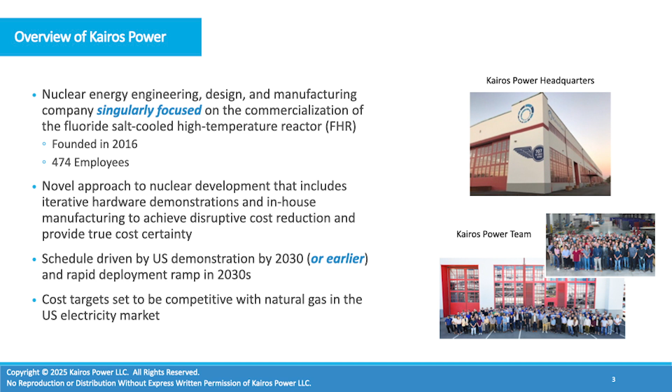Licensing certainty, it's a very heavily regulated technology, so you have to be able to convince your regulator that you've got the right approach and the right design. So there's a lot of licensing risk for new nuclear technologies. Supply chain and manufacturing. So this is a new technology. Do you have a supply chain? Do you have the capacity really to build the pieces and parts that go into your reactor technology? And last, but certainly not least, construction risk, build certainty. That's a really important piece of really deploying these technologies on cost and on schedule.

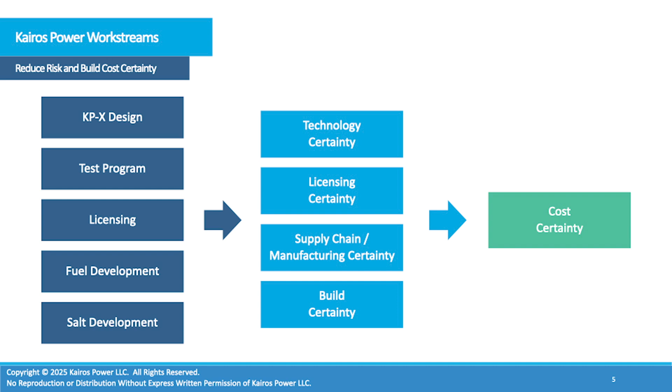So in practice, everything we're doing right now really feeds into these four buckets. So all of our dominant work streams right now, and all the iterations that I'm going to talk about today in terms of our demonstrations, really go into these four buckets here. Technology certainty, licensing certainty, supply chain certainty, and really build certainty. And we believe if you're not working on all four of these while you're developing a new reactor technology, you're most likely going to have challenges on the back end.

And if you look at the time cycles that it took to actually get that reactor technology deployed, actually up and commissioned and actually operating, you're talking about a 30-year development cycle. That's a very long development cycle from 1990 effectively all the way out to 2024. So really trying to drive those development cycles down is a really big part of what Kairos is trying to do.

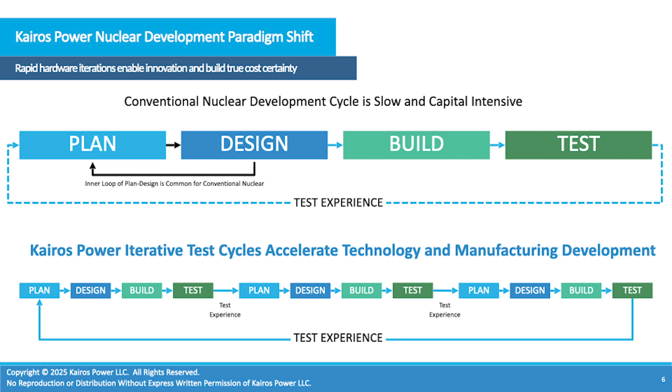There's a lot of challenges in going 30 years for a development cycle that I don't need to spend time here talking about, but that's really the paradigm that we're trying to break right now. And we do that actually in a non-intuitive way. We do it through a series of smaller iterations, and I'll talk a little bit about how we do that, but the important piece here is we get feedback into our design earlier than you would get if you're going through these larger development cycles.

So how does that happen in practice? So what we do at Kairos, we focus a lot on non-nuclear development. It allows us to move actually quite quick. We'll talk a little bit more about these projects here in a second, but we have a series of what we call our engineering test units. There's engineering test unit 1, 2, and 3.

Engineering test unit 1 and 2, they're located here in Albuquerque, and I'll talk a little bit more about what those projects are. The engineering test unit 3.0, that's actually in Tennessee. And then we have our 2 demonstration reactors that we're working on right now, which are Hermes 1 and Hermes 2. So a lot of my talk today is going to be giving updates really on these engineering test units and what we're doing in Tennessee on the reactor side.

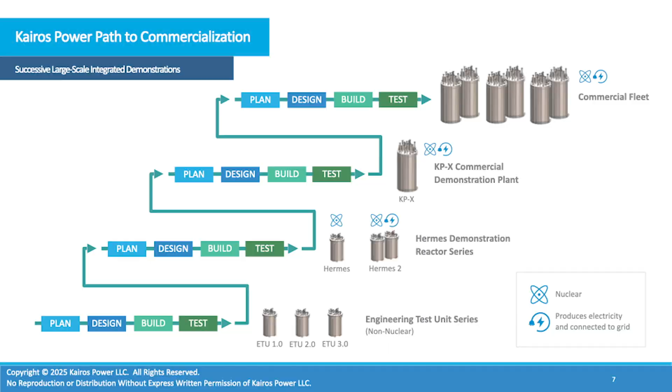Just a little bit about the company and our locations. We have a presence actually across the United States. So we're headquartered in Alameda, California. We opened up our manufacturing development campus in Albuquerque in about 2019. It was a very dynamic time. Unfortunately, the pandemic hit right when we actually announced we were going to buy the property, and that created some challenges in terms of early staffing. We had plans to bring people out to California, really for a lot of knowledge transfer. Obviously, the inability to travel during the pandemic created a lot of issues.

We're developing a facility at Los Alamos National Lab to produce fuel for the Hermes 1 reactor, and that's at what's called the low-enriched fuel fabrication facility. And we have an analogous facility right here where we're doing effectively fuel development, but not at the scale that we would want to do in Los Alamos. We have a site in Oak Ridge, Tennessee, where we're building the Hermes 1 and Hermes 2 plant. We started construction on the Hermes 1 reactor, so that work has already started.

We have a small licensing office in Charlotte. We have an instrumentation lab in upstate New York, and we have a facility at a partner called Materion, which is actually where we produce our coolant FLIBE at scale. So that's an important location for us where we produce our coolant.

So I mentioned vertical integration. Really, the vertical integration that we've been focusing on does include some of our major work streams. So fuel and salt are really important to Kairos. That's very important to our safety case. It's important to making our reactor work. So we've made commitments to bring in salt production as well as fuel production. These are just examples. I mentioned the site that we have in Elmore, Ohio. That's where we're able to produce metric ton quantities of FLIBE that we need for our reactor demonstrations.

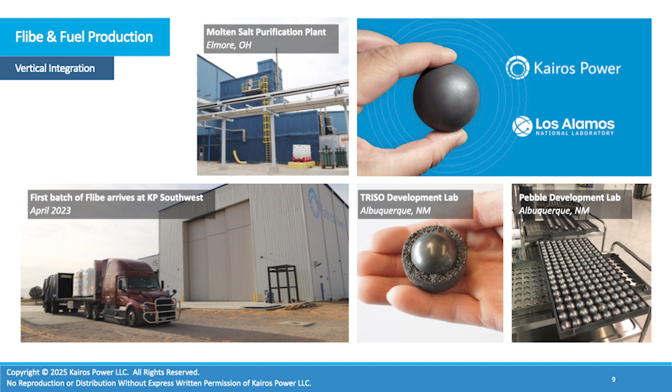We have a pebble development lab where we produce pebbles, and effectively we're standing up a TRISO development lab where we have a state license and we work with effectively natural uranium and depleted uranium. So it enables us to iterate very quickly and bring in design concepts into the fuel form itself.

In terms of manufacturing, about a quarter of Kairos is actually in manufacturing, so we have a very big manufacturing presence. We hold an ASME stamp for Section 8, so we're able to do vessel production. We set up a lot of this capability with actually a lot of local hires. It's been a great process in terms of standing up the manufacturing.

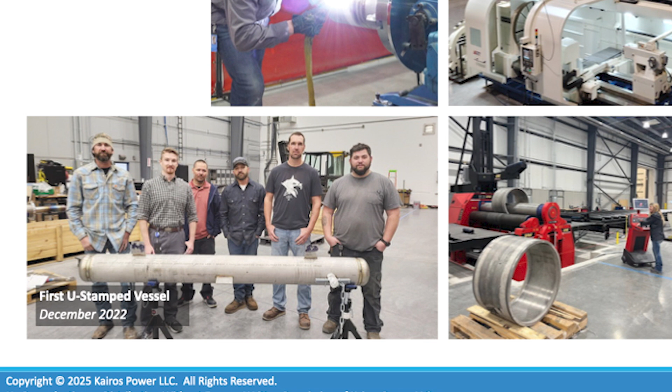So in terms of manufacturing capabilities, we've stood up a lot of milling and turning capabilities at our site, and that's shown in the upper right. Up there, we have a pretty substantial welding team. We brought in vessel manufacturing. That's an area that we've been focusing a lot of our attention on. We will be producing our own reactor vessels as well as vessels that support the overall technology.

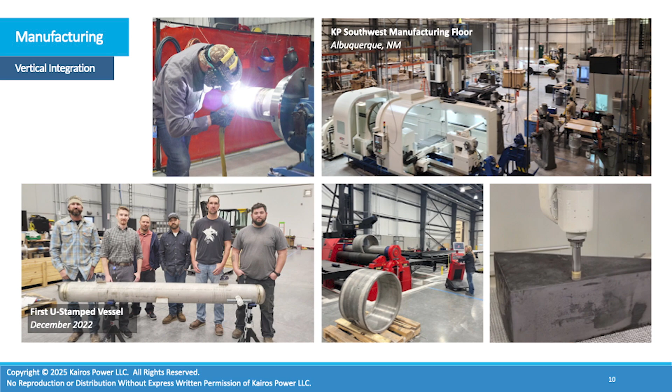And in the lower right, we have graphite in our reactor as a moderator. It's a very important part of the design. The graphite machining is a capability that we've also invested in and are standing up. So there's a lot of manufacturing activities happening down in Mesa del Sol. It's effectively where we do our large-scale manufacturing and a lot of our large-scale testing.

To talk a little bit about a commercial agreement that was announced. We have an agreement with Google that was signed recently. You may have seen the news around that. There's been a big push from the hyperscalers and a lot of interest in AI power demand challenges. And so we have a partnership we're very excited about with Google. We've signed a master plant development agreement that really creates the right framework for us to set up power purchase agreements with utilities and regions that Google is trying to service. So that's a process that we're going through now.

And we do, oh great. Whoa, that's pretty loud.

We do plan to have some news that will be coming out in the public domain relatively soon. But this is an agreement that allows us to work through the commercial case on the back end, which is really important to us.

Here's some additional information around the vertical integration part. These are just some of the pieces and parts that we are focused on. On the left-hand side, you can see some of the manufacturing activities. I'll talk a little bit later about the vessel manufacturing. This is rolling plate here. These are pieces and parts that go into key parts of our reactor system. So a lot of focus on effectively building and demonstrating the technology.

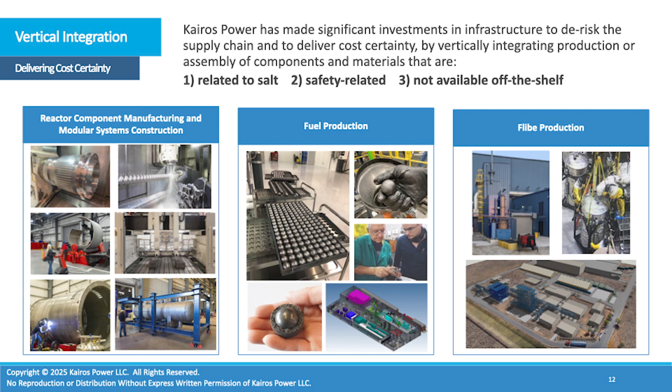These are pictures of the fuel production line and some of the pebbles that went into our first engineering test unit. And then we talked a little bit about the FLiBe production. This is a facility that we just broke ground on in Mesa del Sol, called our salt production facility. We just started construction on it. This is where we're going to produce the enriched FLiBe that we need for our reactor in Tennessee. So this is a big project, setting up the capabilities for us to produce FLiBe at scale.

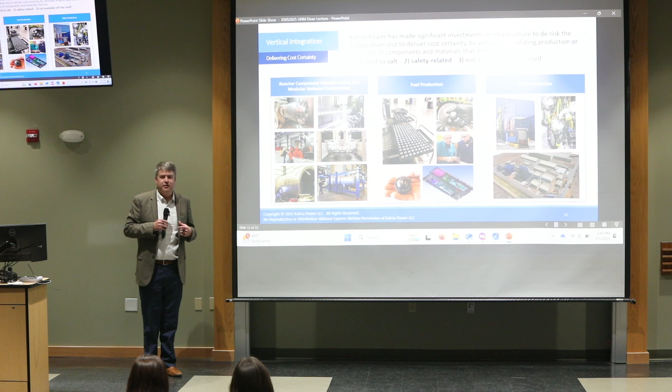An important thing to take away is even though the Hermes 1 reactor is in Tennessee, many of the pieces and parts that make up the primary system actually come from here in Albuquerque and are fabricated here. So a lot of the manufacturing activities are actually supporting that deployment in Tennessee.

So I'm going to talk a little bit about these major iterations. What is Kairos actually doing? We're trying to demonstrate our technology through these iterations. The first one that we built, this facility was run. We've actually decommissioned it and it's been moved out of the current location, but I'm going to talk about it because we got a lot of lessons learned from it. Why did we do this demonstration? I mentioned we do non-nuclear testing.

This is not a facility that's regulated by the NRC. It's a facility regulated by OSHA and EPA and obviously local permitting authorities, but it's not regulated by the NRC. It doesn't have nuclear material in it. It's effectively mock-up material, but it performs mechanically very similar to the reactor system.

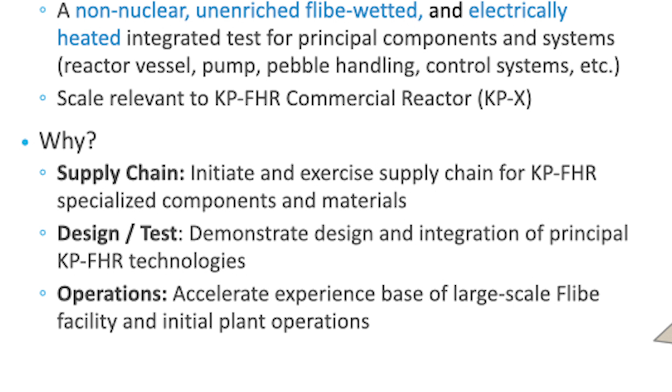The three areas that we were focusing on was really to evaluate our supply chain. If we didn't have a supply chain that can make a mock-up of what we were trying to do, then we knew they couldn't deliver for the reactor system. So evaluating the supply chain was really important to us. It also enabled us to build really an organization that was able to do the design, test, iterations in-house in a very efficient way. So that was also a very important objective for the ETU-1.

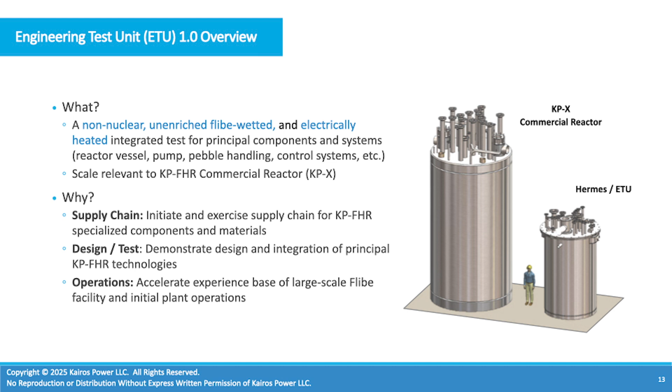And last but not least, once you actually build the facility, running a 24/7 facility like this and getting the operations back into the design, again, very, very critical for Kairos. So again, if you remember my earlier slide where we talked about technology certainty, licensing certainty, supply chain certainty, and construction certainty, these are examples of how this kind of feeds into our development.

So the engineering test unit 1, got some pictures here. I'm going to kind of walk through some pictures of the actual build. As I mentioned, we took the property over right at the beginning of the pandemic. So a lot of this work was happening during that time period. This is all in Mesa del Sol. So this is when we acquired what's called the shop manufacturing building down in Mesa del Sol.

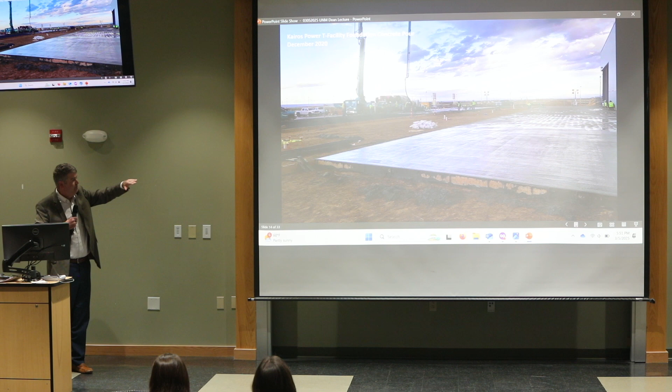The first thing we did was we actually added an annex. It's a beautiful building, but it's actually got a very low high bay in terms of the roof height. So it creates some challenges for doing larger scale tests like what we're building. So I'm going to walk through some pictures that show the engineering test unit 1 in Albuquerque and just kind of show the sequencing of the build.

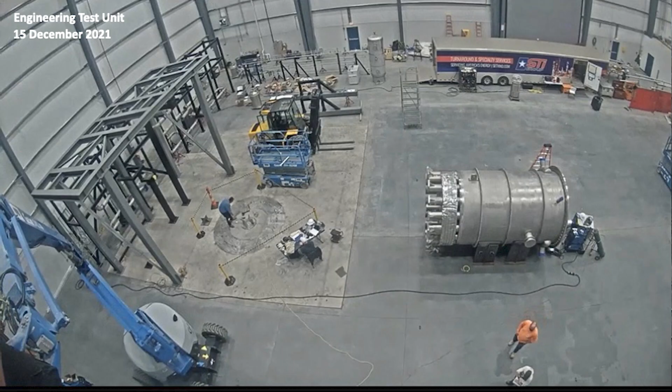So this is what we call our ETU annex. It's now where we do vessel manufacturing. It's a 40,000 square foot pre-engineered metal building. It's what housed our engineering test unit 1. This is a picture of the vessel that arrived. I mentioned we brought in vessel manufacturing.

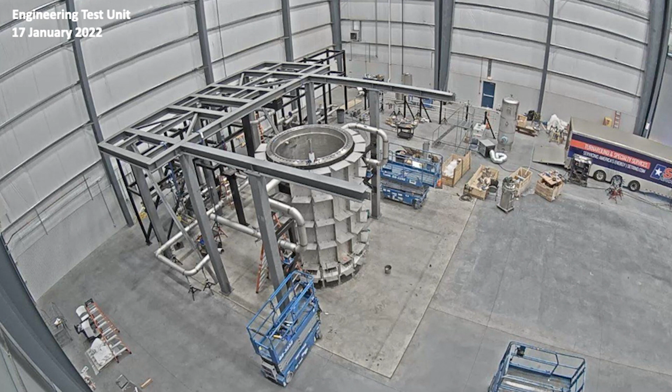This vessel was not produced in-house. It was actually an external vessel. When it arrived, we had some tolerance issues with it, and so we actually had to do a fair amount of machining of the graphite that had to go into the vessel. It was actually a result of this experience that we made the decision to bring vessel manufacturing in-house. So this is a picture of the vessel about to be lowered and placed into its location in the enclosure.

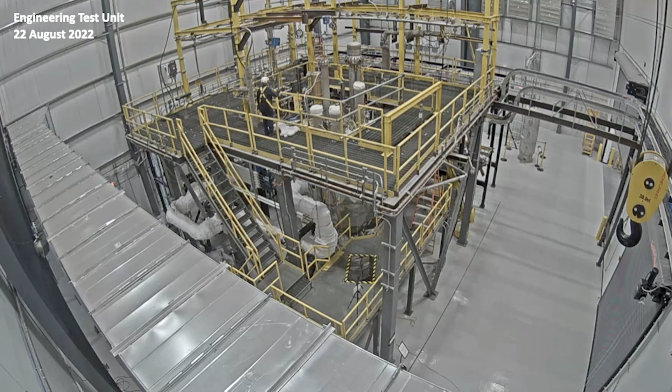Moving forward to August of 2022, you can see more of the upper head equipment has been installed. In the upper region, you've got insulation going up around all of the piping and the vessel, and you can see more of the facility coming together. And this is the final picture of it prior to operations, actually post-operations.

We self-perform a fair amount of the work that we do. Certainly for assembly of the engineering test unit in the upper right hand, you can see some of our team members actually installing the graphite blocks in the reflector structure within the actual vessel itself. In the lower right, you can see FLiBe actually arriving. Again, it's about 12 metric tons that we loaded into the engineering test unit 1, which is a pretty substantial amount of material.

We have 2 control rooms. We have one in Albuquerque and we have one in California. So we're able to do remote monitoring from California as well. This was a big change for Kairos. We're not a 24/7 operations company, but when we started up ETU, it became very clear we would have to run this facility 24/7, and we had to do it over several holidays, and this was a big shift for the company, but it actually created a lot of opportunities to build up the operational program that we're going to need for our reactors. So what are some of the lessons learned?

I mentioned really from the ETU1, we had some tolerance issues with the vessel as it arrived, so that was a major lesson. If you look at reactor installations, the vessel is a very central part of the construction process, and so not having your vessel early is a challenge. It's also one of the last components you want to design. So there's a lot of tension between trying to get the design complete and having the vessel arrive.

Because of the out-of-tolerance issues that we had with the vessel, we actually had to remachine all of the graphite blocks. There's about 308 graphite blocks that make up the reactor internals here. We had to go back and remachine all of those graphite blocks, which was a big deal for us, but because we had that capability in-house, we were able to do that relatively efficiently.

A lot of positive experience about the pump. This pump was actually a pump that we worked with a company called Barber-Nichols to develop. We brought a lot of that technology and capability in-house, so the pump that we're building for the ETU2 is all built within Kairos proper.

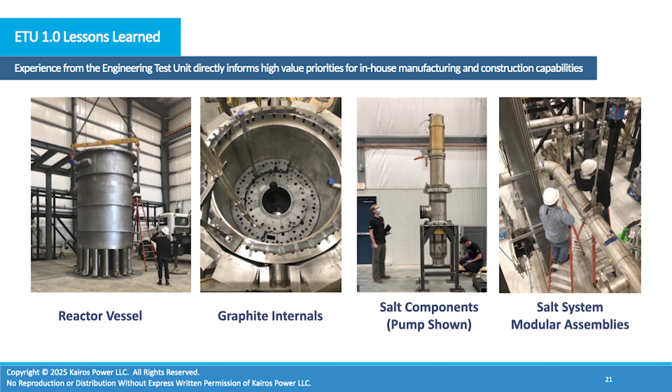One of the major lessons I would say is getting a complete design and getting a facility like this through the finish line actually takes a lot of work. There were many times that we were at 90%, and we were at 90% for a long time. The reality is getting the design complete has a lot of major challenges. And so when you look at nuclear construction today, one of the things that they will always say is you need to have the design complete prior to starting construction.

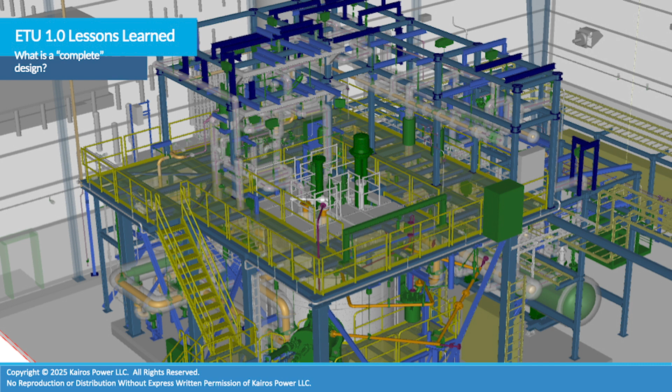In practice, getting to a complete design has a lot of challenges. So this was a very important process for Kairos to get to that final finish line on the design, but that was a very valuable lesson for us in terms of not being too optimistic about schedule and ensuring that you have the ability to deliver.

This is just a little bit of information about ETU1 in terms of the numbers. It's a high temperature system, so it operates normally around 550 degrees Celsius. These are just some of the capabilities that were demonstrated. We like to say it's the world's largest FLiBe system that's ever been built. The other large FLiBe system that we can look to is really the Molten Salt Reactor Experiment that was built in Oak Ridge, which had about 4.5 metric tons. So this is at a pretty substantial scale in terms of the new application and the new environment in terms of the actual tonnage of the salt.

We have a system where we insert pebble fuel, so it's online refueling. The ability to demonstrate that capability was really important for us, so we were able to go through that process of loading fuel in and removing fuel. We were able to push the pump to very high flow rates, so get confidence in how the pump behaves. We do have a mock reactivity control system. It's actually all the same equipment that you would use in an actual reactor, but of course we're not controlling reactivity, but we're able to see the mechanical insertion, how it performs and how it behaves. So we had about 25,000 strokes of that system.

And then also chemistry control for us is really, really important. The ability to actually demonstrate chemistry control and show the ability to take samples and to be able to monitor, those are all really important steps for us. And it's very difficult to do that for a first-of-a-kind reactor system. If you can do that in a non-nuclear environment, you can demonstrate a lot of those capabilities.

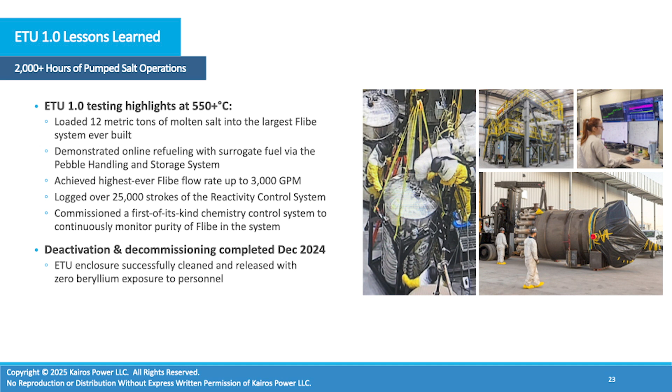And last but not least, we had to go through the full life cycle of actually decommissioning the facility and removing it and cleaning it in a very responsible way. And you can see on the lower right, that's actually a picture of the vessel leaving the facility. That's really important to us. We're going to be building a reactor where we're responsible for the D&D of that facility. And so getting lessons into how to decommission these facilities, even though this isn't a rad environment, it's a beryllium-bearing salt, it's still a very highly toxic environment. And getting those lessons has been very important for us in terms of driving costs down for the Hermes 1 reactor design.

So I'm going to talk a little bit about a new test that we're building right now, which is called the Engineering Test Unit 2. This is an activity that we're doing right now, and again in Mesa del Sol. Why are we doing it? Well, there's about 4 of the reasons listed here.

We have very strict cost targets that we're developing this Engineering Test Unit 2 under, really related to the 80% of the cost coming from commercial off-the-shelf items and raw materials. So that really forces our team to have to leverage our manufacturing capacity, and that's been very critical for us, better leveraging our manufacturing capability.

Demonstrate some more features of the actual Hermes 1 reactor system, so how we can actually start up the reactor. That was very critical for us. In particular, we were looking at also capabilities around upper head maintenance and things of that nature. One of the big features for the ETU2 that we've been adopting is really this modular design concept. And so a lot of the Engineering Test Unit 2 is actually being built in a facility next to the enclosure that I showed you earlier, and that equipment's going to be brought in as it's being readied.

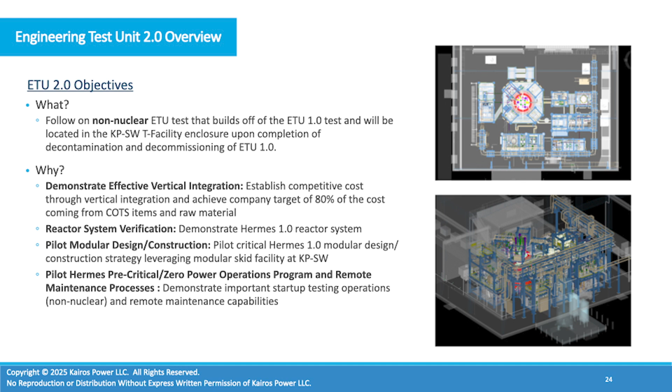And then last but not least, every FHR that we operate as a company will actually start off as an ETU. It'll start off in an environment where you're introducing effectively non-nuclear fuel, and then you will add nuclear fuel as you go. So all of our reactors effectively have to operate in this environment prior to actually doing our pre-critical and zero power testing. So we're actually able to bring a lot of that test program into the ETU2 and demonstrate how we're going to start up Hermes 1. So that's very critical for us in terms of developing procedures and how we would actually start up the reactor system.

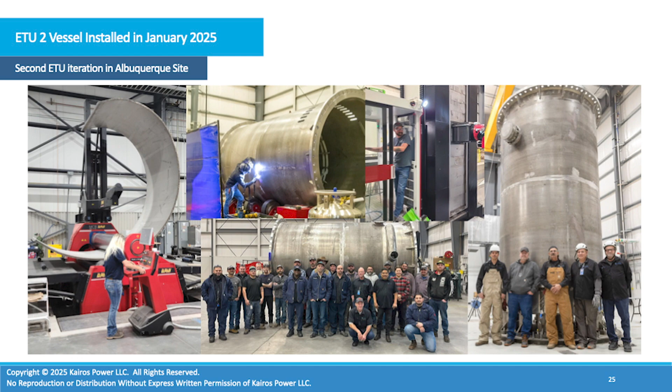So where are we with the Engineering Test Unit 2? Very pleased. We got our vessel installed earlier this year in January. This is a picture of the team. This was a vessel that we did entirely in-house. We have a milestone for our DOE program that we had to install this vessel. We hit the milestone of January, so that was really important to us. And this is just a picture of the team very proudly showing the vessel prior to insertion over here.

Plate comes in, it effectively gets rolled. There's a whole process, of course, around machining and welding the vessel together. And then the installation is shown here on the right-hand side with a very proud team that finally got the vessel installed. So we're building out this facility as we speak.

Got some more pictures that show, as I mentioned, we're doing this in a modular build fashion. So we have our modular system facility that is adjacent to the enclosure. There's about 32, 33 skids that make up the Engineering Test Unit 2. And so by doing this in a modular fashion, we're able to actually build out the facility next to the facility while we're doing the decommissioning work that I mentioned earlier.

This is an approach that we're going to utilize for Hermes as well. So we'll be able to send similar equipment to Tennessee, here from New Mexico, to go be installed into those reactors in Tennessee. And so really the lessons from ETU2 are going to inform the construction of Hermes and what we're doing in Oak Ridge, Tennessee.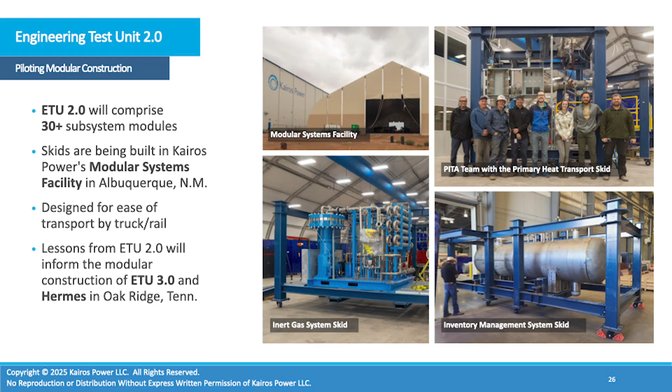We have 73 drilled piers that make up the foundation of our ETU3 building. A little schematic of it shown over here. It's actually bigger than our Hermes 1 reactor building, so it's a pretty substantial structure. It's the same technology and the same contractors that we're going to be using for Hermes, and the nuclear safety related construction.

So there's 73 drilled piers, 73 lessons in terms of how, when we go into the nuclear construction for how we build Hermes, we can bring those lessons learned into that environment. That's really important for us. Having effective quality control is absolutely essential for nuclear construction, and getting those lessons from commercial construction, then bringing them into the nuclear environment early has been a really big win for us.

We're going to be building effectively a lot of the upper head components that go into the reactor in this building over here, which is really where the ETU-3 is going to be located. We plan to install that vessel in May, so that's what the team is working pretty closely on. We're not actually fabricating that vessel, but we'll have some announcements about what we're doing in Engineering Test Unit 3 here pretty shortly. But this is a capability we've gotten started on in Tennessee, and this is really the precursor to the Hermes 1 construction.

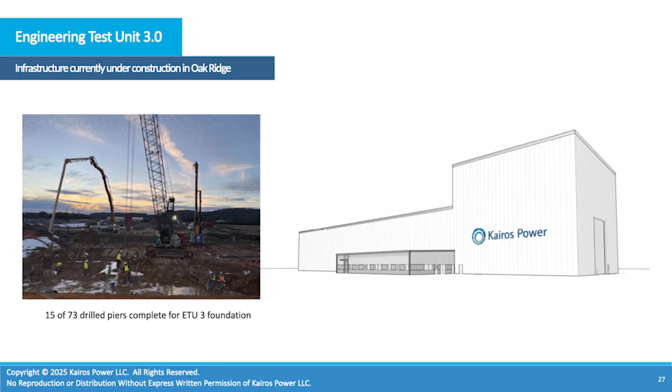So I'm going to talk a little bit about the Hermes reactor itself. This is a nice artistic rendering of it. As I mentioned, we are starting with the commercial construction for our ETU-3 on the drilled piers, but we have done excavation for the Hermes 1 site. So we've completed excavation. That's been a pretty substantial challenge.

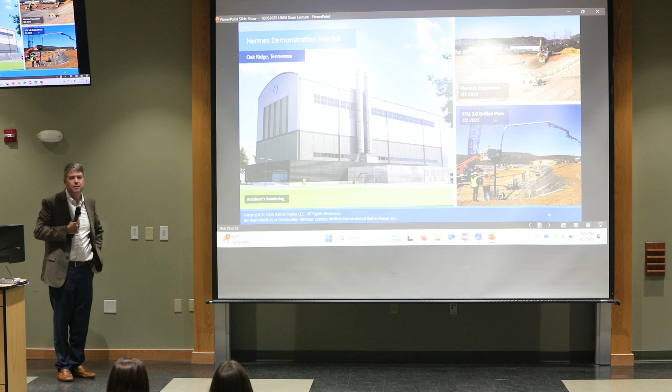The site we have in Tennessee, it's a beautiful site, but it's also the site where the K-31 and K-33 enrichment facilities were originally located. DOE spent a lot of money actually cleaning up the site and preparing it for companies like Kairos and others to be able to come in and leverage that site appropriately.

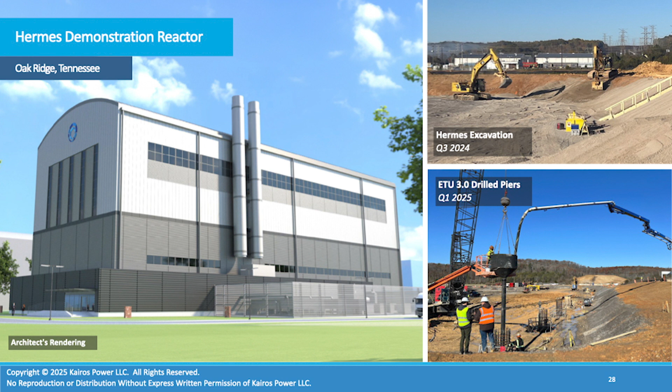One of the challenges is that a fair amount of that K-33 enrichment facility had footers and duct banks located underground, so when DOE removed the original building, the subsurface components were still in place. So when we did the excavation, we had a lot of work managing and removing that material responsibly. But we got through that, and we'll be starting drilled pier construction here for Hermes 1 in about 6 weeks.

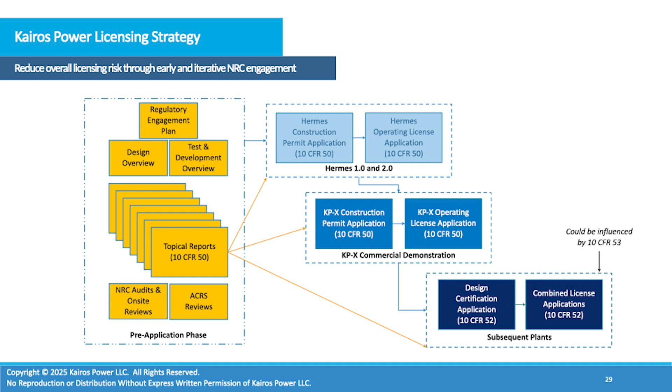That allows us, when we submit our construction permit, to have a lot of that licensing risk de-risked and get those insights into the licensing package. So that's been a big part of what we've been doing. This just shows some of that engagement, and that's been going very well to date. In terms of what we've accomplished on the licensing side, we have construction permits for both the Hermes 1 reactor and the Hermes 2 reactor, which will enable us to effectively start construction.

As I mentioned, what Kairos is doing is a little bit of a change from the historic approach, which was always what we call a 2-step process. There was an effort to make it more streamlined, what we call a Part 52 process. That had a lot of challenges in its implementation, with that big project I mentioned in the Southeast in Georgia. And so Kairos has adopted that 2-step process. A lot of the developers today are going back to that 2-step process.

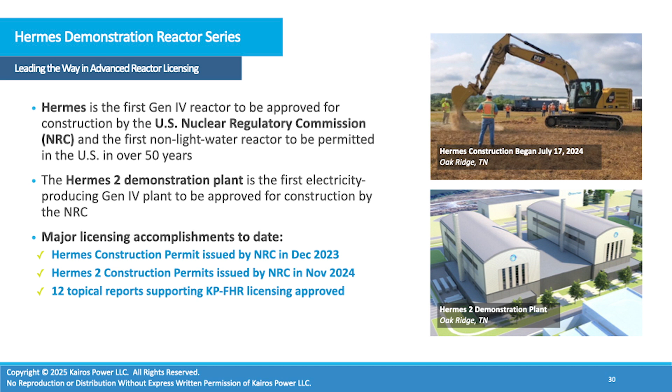What that basically means is you submit a construction permit, which allows you to start construction, and then you submit an operating license application to be able to run the facility. So there's 2 steps in that process, but it does allow you to start construction early on. This shows some of the highlights here. We've issued 12 topical reports, and we've got those 2 permits. This is a really big part of getting the licensing certainty that I was mentioning earlier.

So I'm going to conclude here. I think 35 minutes was roughly where we were going for.

Just some key lessons learned and observations. Leaving an academic environment in a great place like UNM and going into a more commercial environment and learning how to do things differently, there have been a lot of lessons taken away. These are some of the key lessons I've been thinking about and writing down. The right strategy is essential, but the biggest challenges are in the execution. That nice chart I showed you earlier is pretty easy to put together, but in practice, delivering these installations takes a lot of work, and the execution is really critical, and that's very important for Kairos.

I would say the hard things are often easier than people think, and the easy things are often much harder than people think. When we vertically integrated, we heard a lot of people say, don't do that, don't do that. The reality is it is difficult, but a lot of the things that people said were hard were not impossible, and they may not have been as hard as they were.

On the flip side, I would say things that we thought would be easy, hiring, bringing certain folks in, finding the right talent, actually proved to be quite complicated. So I think a level of humility is important. I think this is probably pretty common for a lot of ventures and new startups. The balance between speed, creativity, and structure and process is a constant struggle.

It's a challenge, and one of the things that Kairos has tried to do, we focus very much on, is to have an organization that's quite agile. And that can be very difficult when you start to get a company of the size of 450 and so. So that can create a lot of challenges.

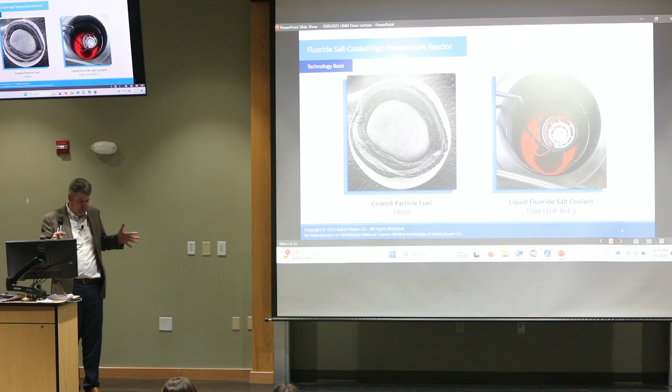At our peak, we were producing about 300 pebbles a day for the non-nuclear pebbles. So that's just pressing graphite pebbles. I don't have a full answer for you for soup to nuts. When we get our TDL facility up and running, we'll be able to inform that more. But that is an important part. As the schedule gets compressed, we do have to find ways to deliver the fuel faster. That's where these capabilities actually are really, really important for us.

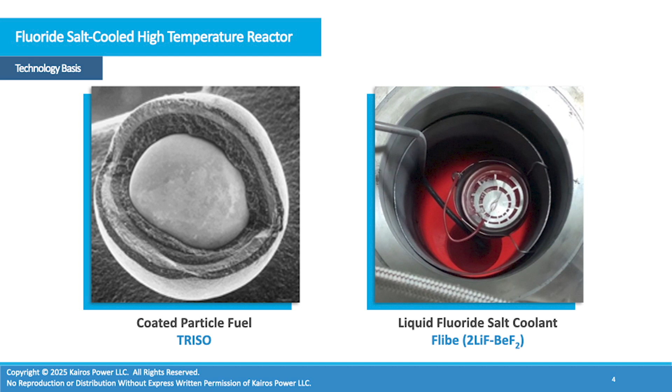So for the engineering test unit 1, we had about 35,000 of these pebbles. All 35,000 were hand pressed by our technicians, hand pressed. And we actually developed automatic pressing capabilities to be able to accelerate that process. That's really important to us because we have a pretty small facility at Los Alamos that we'll be putting our equipment into. So to be able to get more production and capability out of it, it's really important for us.

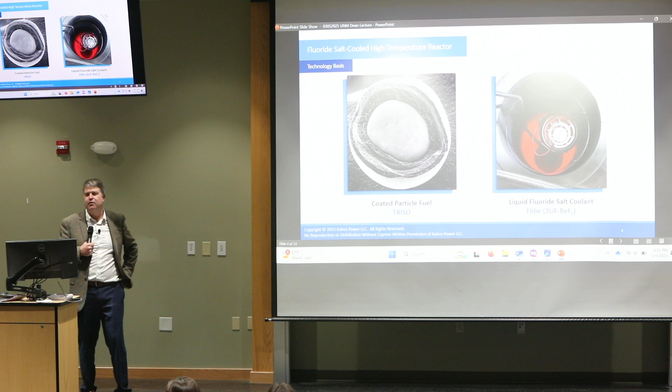Maybe just coming back again to the start of the company, to which extent came IP out of the university system into the small startup? Sure. So Kairos' position on IP is a little bit unique in the sense that we believe our technology is relatively novel enough and we're moving fast enough that spending a lot of time filing hard IP and patents and things like that has not been a focus for us. So we don't have a very large IP portfolio.

It takes a lot of effort to file those patents, and then your engineers are now filing patents instead of doing development and moving things forward. So we've not had a strong focus on IP. There has been some IP that's been developed at the university. Some of it has been leveraged, certainly for the work that we've done here at UNM. That IP is less applicable because it was for a different design at the time. But there's really not a lot of incoming IP that we've been overly concerned about.

But it is part of our strategy around protection. We do have trade secret activities around the fuel and the salt, which are important to us, but those are not in the visible sphere. Can you comment on the environmental impact of this technology compared to other technologies and how you can sell it to the general public?